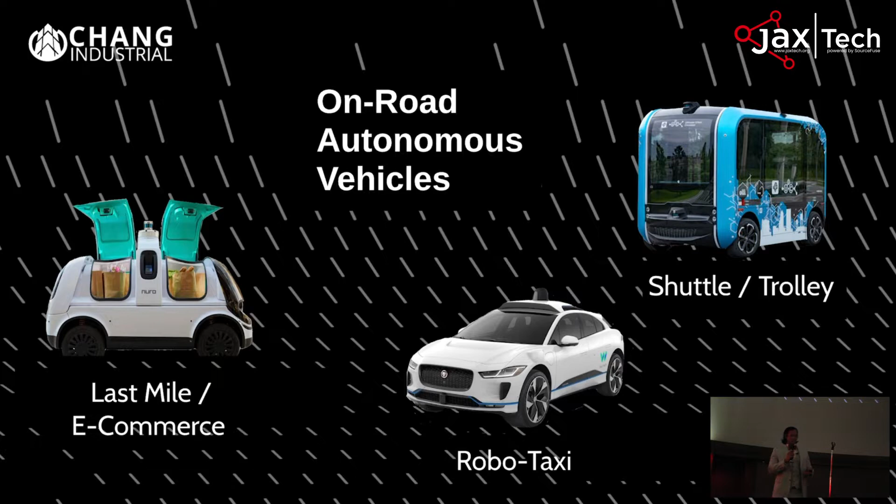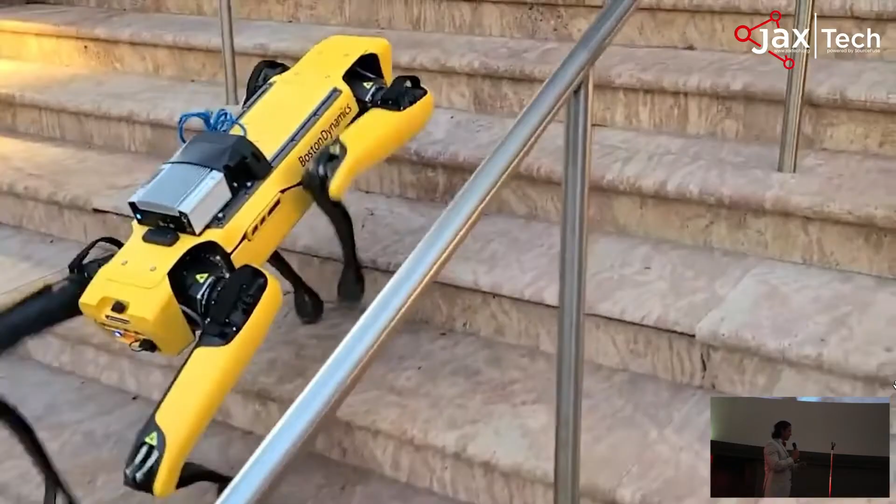Next, we're going to jump over to off-road. This is where things move a little bit faster. So we'll start with Spot the Robot Dog, because we can't talk about autonomous navigation without Spot. But I want to give context of what companies are able to do. One of the interesting things about Spot right now is that it's being driven by open form fleet managers. So now all of a sudden, that proprietary technology by Boston Dynamics is being driven by anyone, as long as you have the know-how to drive that driverless package.

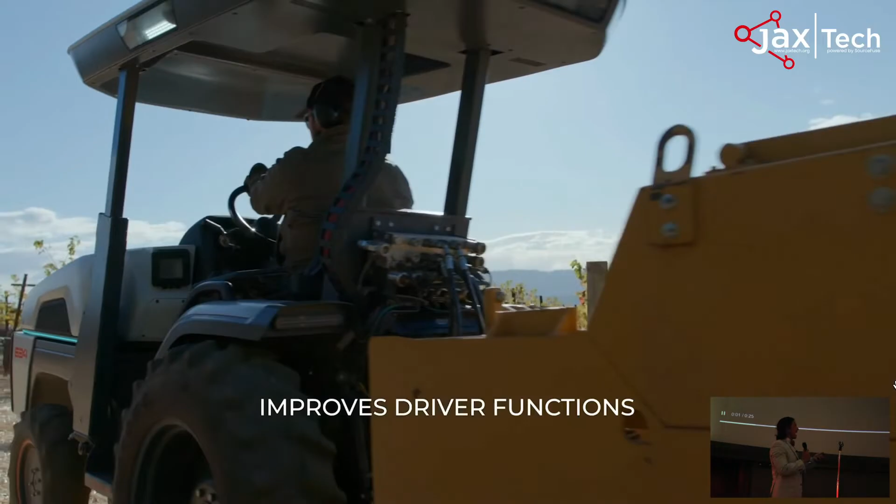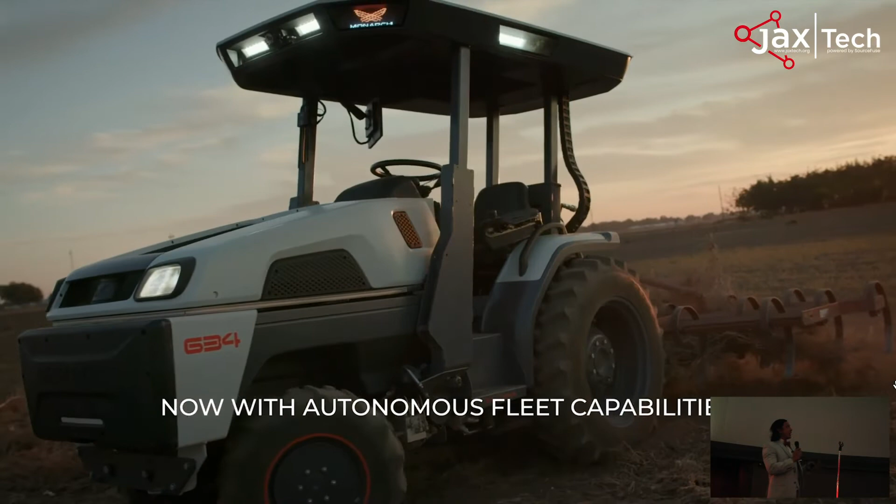The next one we're going to look at is ag. So what is happening in ag? That's a super exciting space, and there have been a ton of announcements just this year about driverless and autonomous electric-driven agricultural vehicles. Why is that interesting?

Because we actually have very little science about most of agriculture. We'd love to know about crop densities. We'd love to know about yield, what we can expect at the end of harvest. We'd like to know how our fertilizers or our pesticides or sunlight or drought conditions are affecting crops, and we just don't know that right now. So by adding this layer of technology, the industry is headed that way.

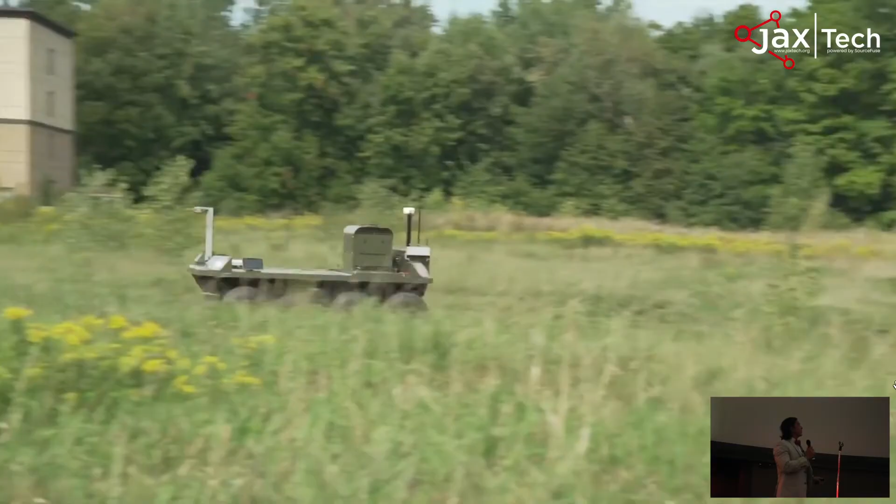Finally, are there any drone owners in the audience? Anybody own a drone? Okay, that's good. I feel like that was planted. We had some hands go up. So if you like the idea of drones, it's pretty easy to see that you might have your own little driverless vehicle soon. I mean, that just looks super fun.

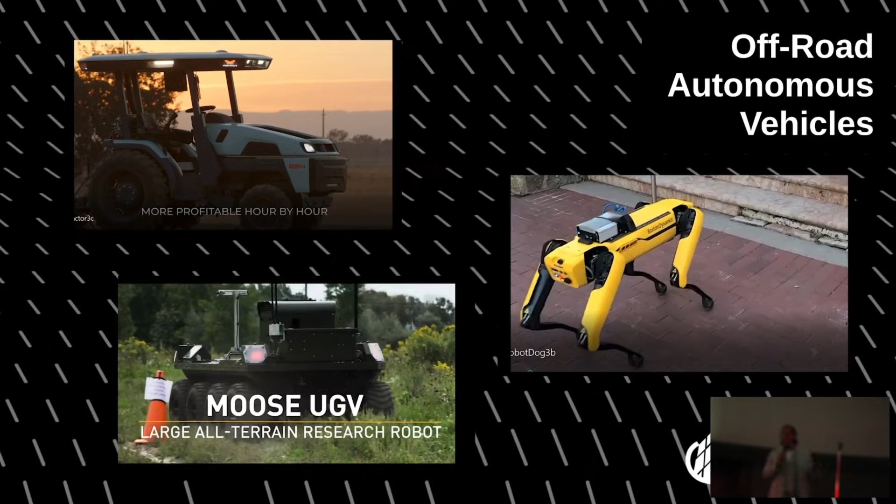And so what's happening is the operational design domain, the ODD, of these off-road vehicles is different than what's happening on-road. We're not constrained by regulation, so we can do some really cool stuff. That also applies to things like the military and mining. So I'll do a quick pause. We talked about what's happening on the road. Who's driving it? We talked about off-road, and you got a sense for just how diverse those driverless packages are.

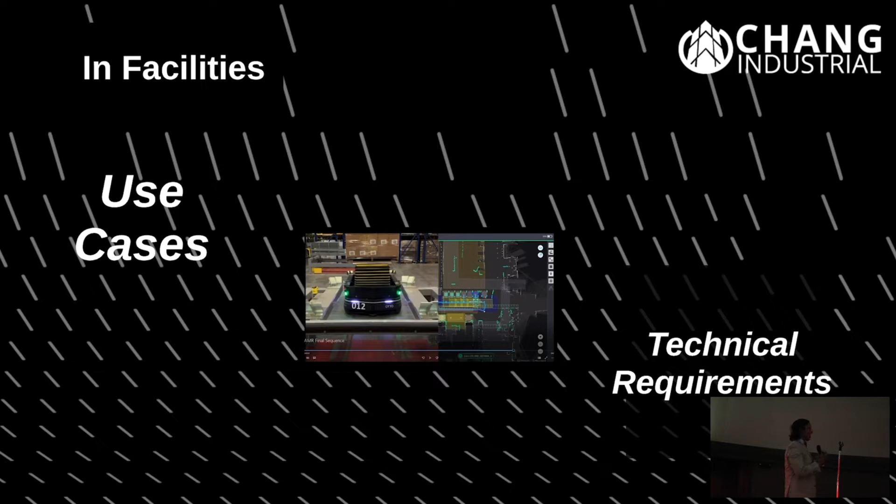And now we're going to look at what's actually making economic sense. I don't think either of those have a payback to them, but we're going to jump in right quick and look at what's happening in factories. So I'm going to start with the concept of islands of automation to networks of automation. Your traditional advanced manufacturing or e-commerce facility is an island of automation. It's a bunch of robotic or mechanized automated machines separated by people moving stuff around and trying to do stuff.

In the new paradigm, driverless vehicles inside of facilities connect everything. So now we have a network of automation that smartly moves and manufactures for itself. So the first thing, I'm going to talk to you about a use case that we did with a greenfield facility.

This was roughly 100 autonomous vehicles in an advanced manufacturing site, 2 states away from here, so pretty close. And the average driven miles per day is about 1,100 miles per day. So do the math, that's about 400,000 miles per year being driven autonomously inside of a factory.

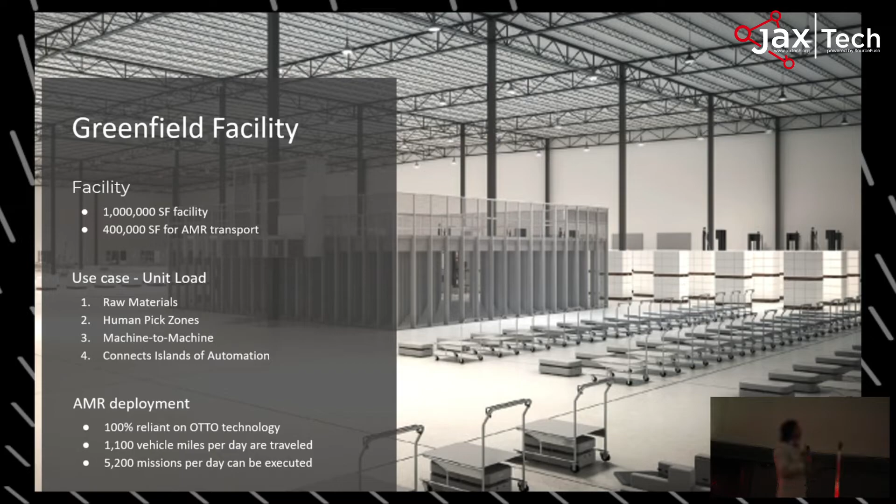The next one we'll look at is a brownfield retrofit. This was a factory we did that was existing, and it had to be retrofit with existing workers, existing equipment, existing storage systems with autonomous vehicles. In this case, the form factor was a pallet.

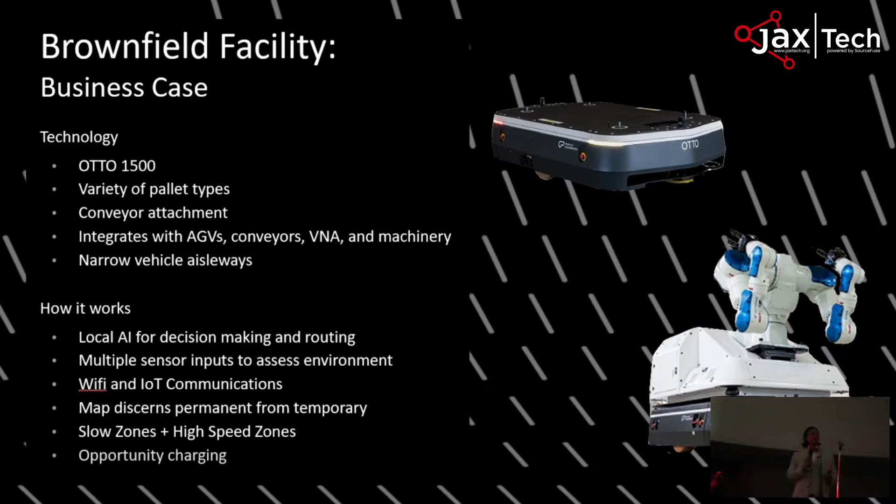We wanted to move pallets around, pallets of goods, empty pallets, full pallets, work in progress pallets. And this one accomplished about 900 missions per day. So in other words, 900 forklift driver put aways or pickups were converted to autonomous.

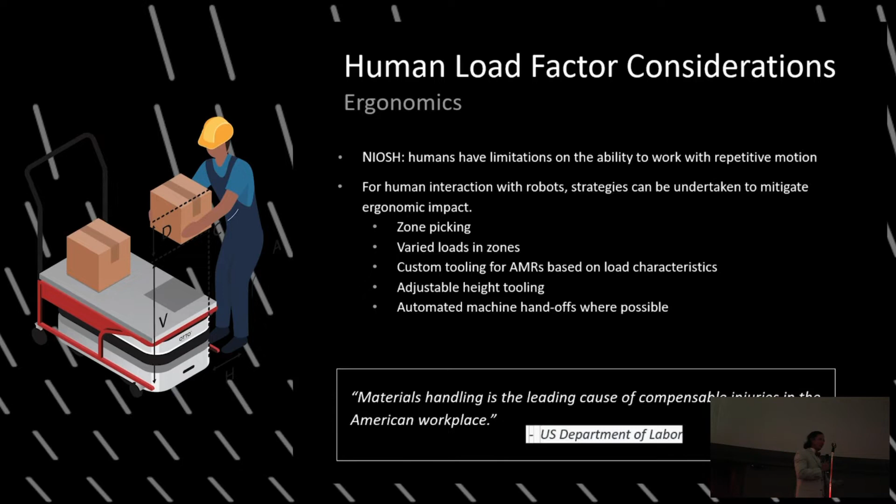And what is basically driving this design? It's the interaction with humans. The single biggest design factor that we have inside of a facility is the ergonomic considerations of humans and the safety considerations of humans. So we consider that closely and intensely before we start the system design, because if the robot and the human don't work well together, the system's not going to perform.

And then finally, what are the dollars and cents? Why are companies doing this? The reason they're doing this is because compared to manual labor, driverless vehicles in a factory are about 10 times more efficient or cost effective. Compared to conveyance, which might be the mechanized alternative, they're about twice as effective. And we have similar stats with forklifts and driverless forklifts.

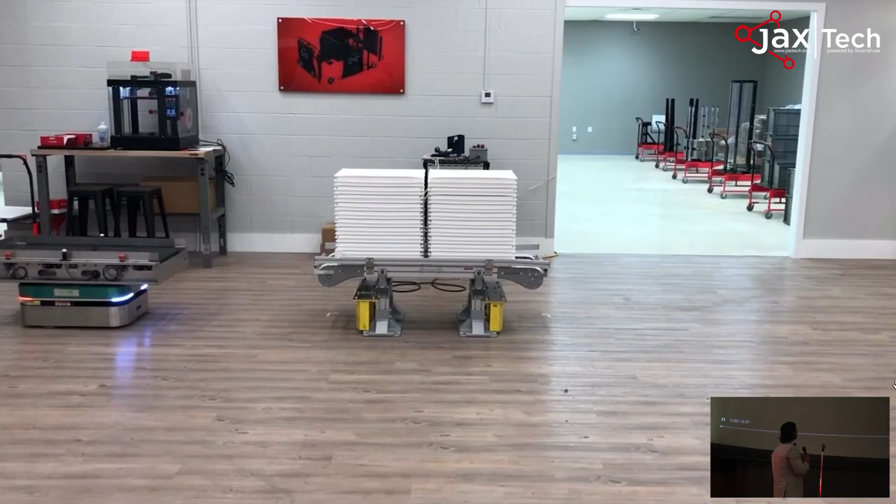All right, so let me show you a little bit. This is basically 3 years worth of engineering. We summarized it down into a little 2-minute clip, and I'll just add a little color commentary as we go along. This is the idea of robot-to-robot integration. So we have a driverless vehicle that is connecting in the test lab to another automated cell. The two are talking via IoT to accomplish their mission.

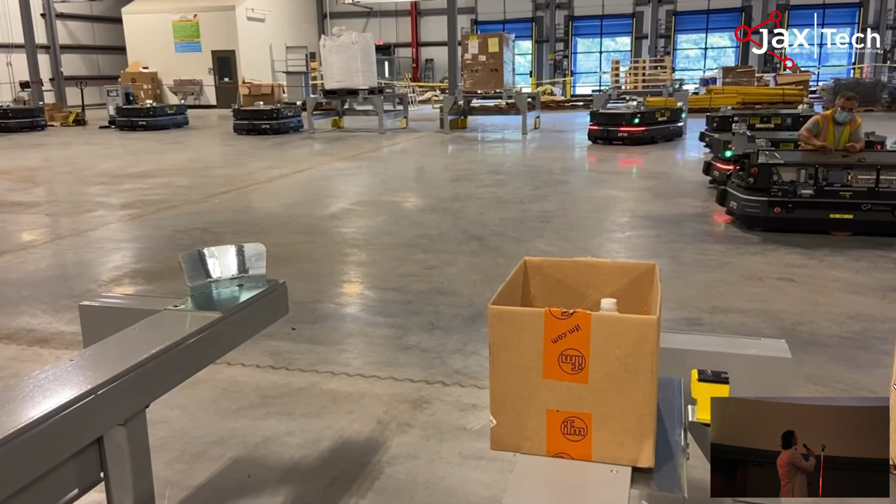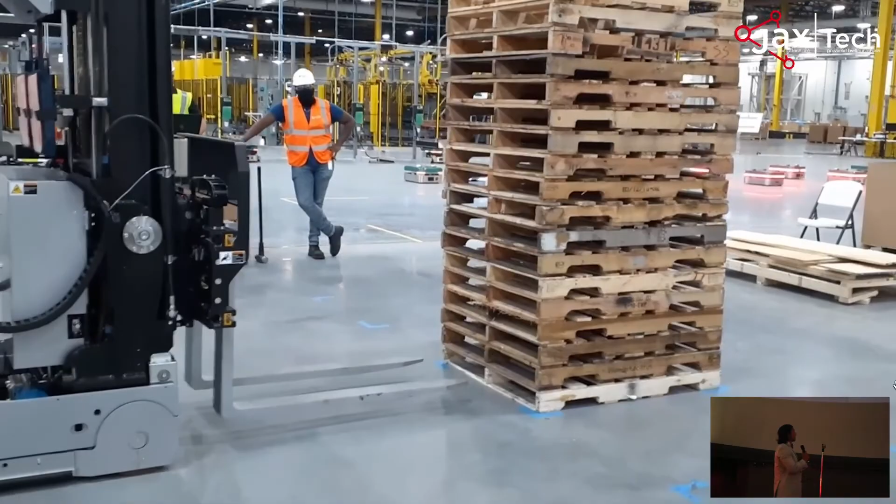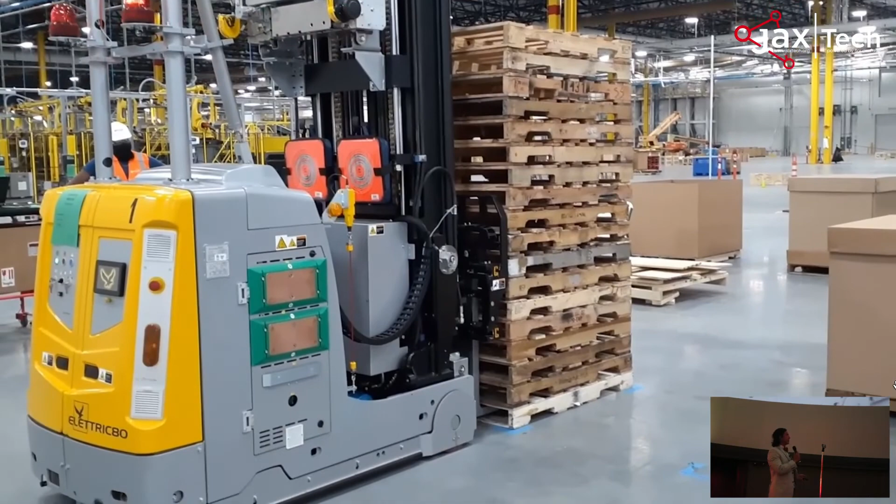Here we can get a look at the fleet manager. On the left you can see all the mission orders. The system is saying, here's my mission orders, I want my fleet to go do these things. This would be another form factor of vehicle that can be integrated to this platform. This one is obviously specialized for a forklift.

And then here's some testing of vehicles where you can see large wooden crates were set out in the setup and testing phase to say, hey, these are in the way. Can the vehicle autonomously navigate around the obstacles and maintain its efficiency?

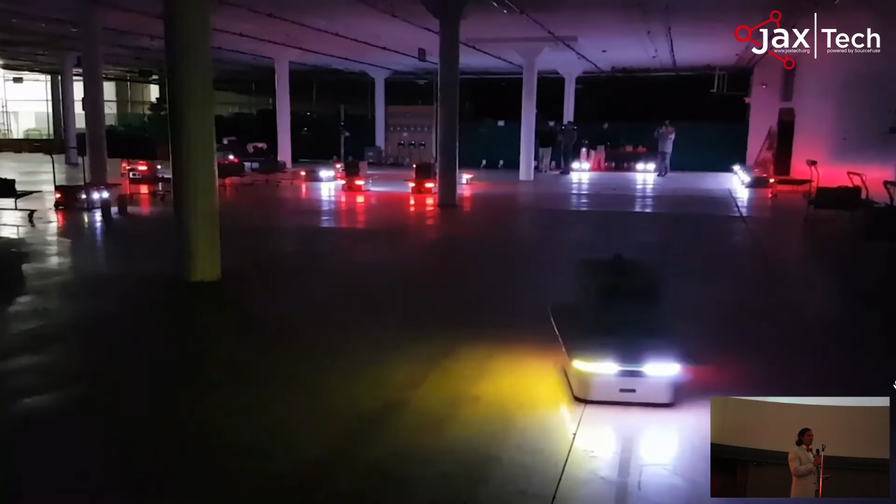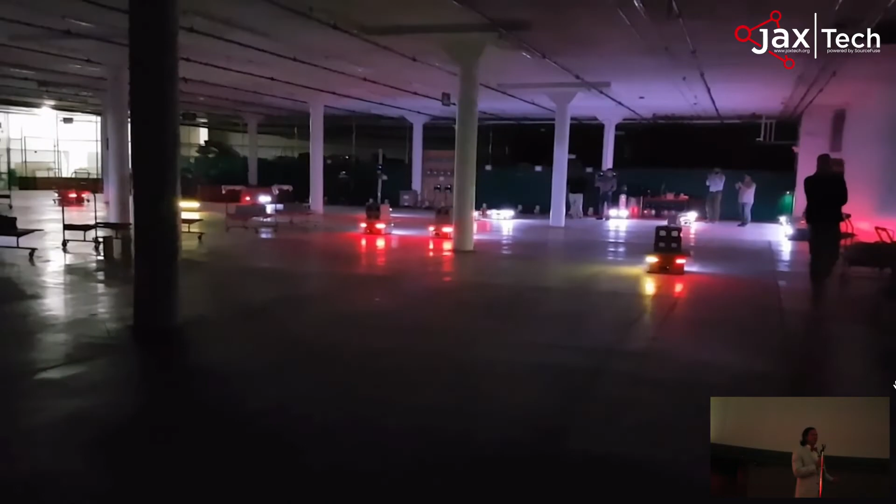Here's another lights out test. My head engineer was pretty cruel. In the middle of a factory acceptance test, he went to the power panel and pulled the disconnect. We didn't know what was going to happen, but everything there is lithium ion powered and it can see in the dark. So the system kept performing, the test was not even disrupted. You can see all the engineers got excited and filmed.

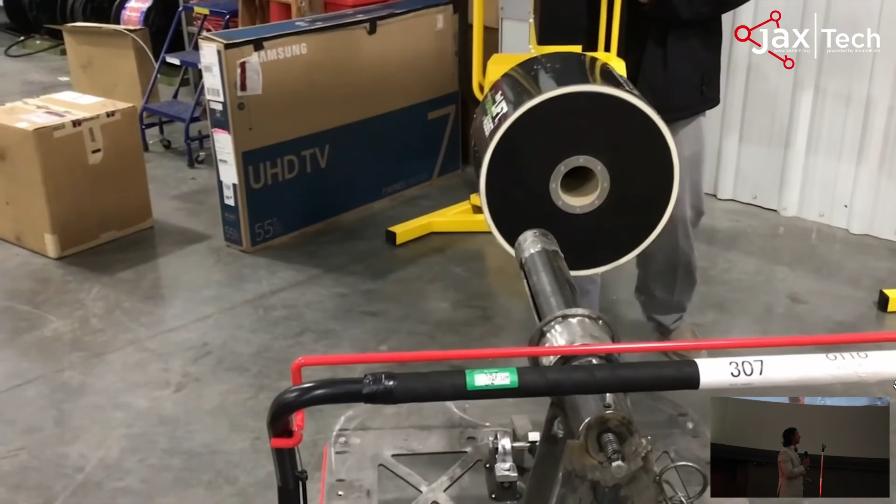Here's some of the ergonomic application. The design load for this particular unit here is about 75 pounds. It's a metal reel. And so there's an ergonomic assist added to the human. The goal here is employee retention. We want employees to have jobs that aren't backbreaking.

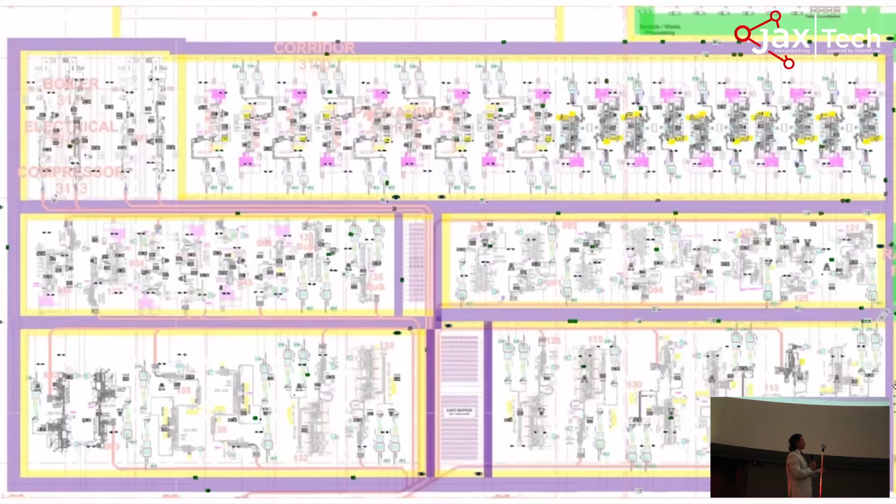That's what keeps employees. Here's a quick look at the simulations that we do. We take 365 days of operation, we compress it into one super fast run on a supercomputer overnight. We come back the next day and we see what broke. And that's one of the tools that we use to tweak the systems. And then here you're going to see live map updating.

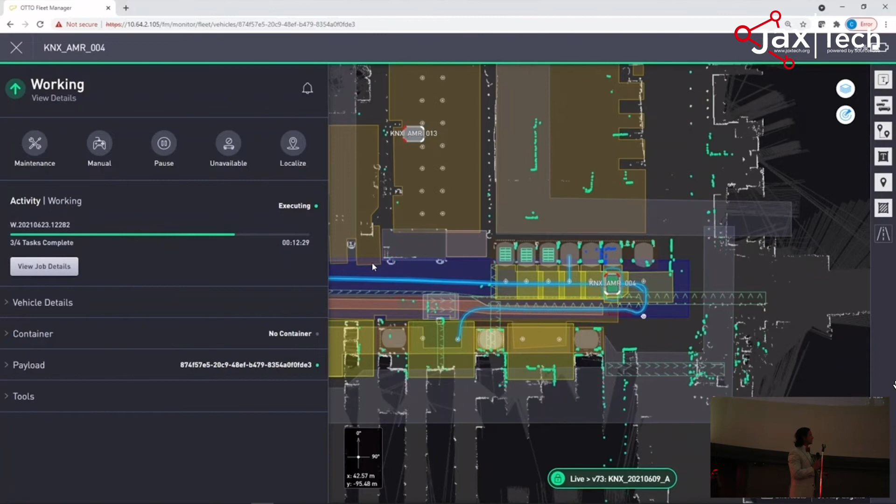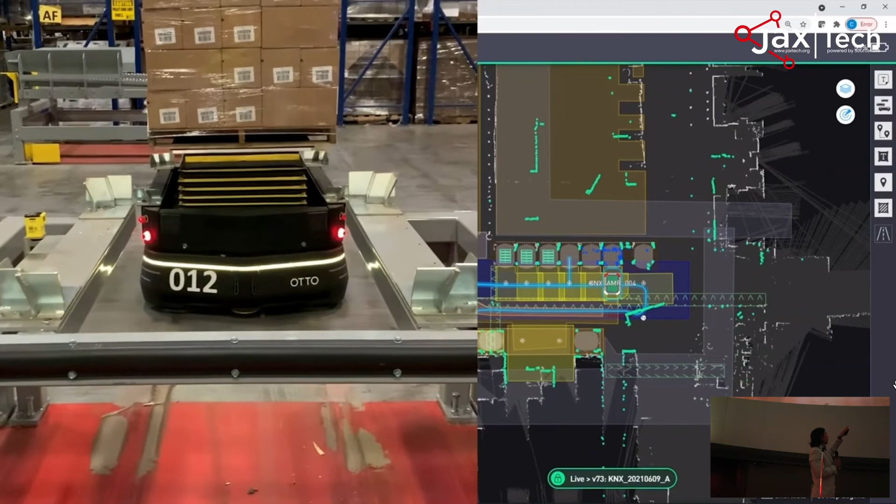And the reason I've got the dots highlighted is it shows you in real time the maps being updated. And then you can track the vehicle being shown on the fleet manager to what's happening here. Those are both real-time synced, acknowledging the mission and having real-time data coming off the vehicles.

There's a powered tool on top that helps. In this case, we're doing pallet lifting. So we've attached a powered tool that runs off the lithium ion of the vehicle.

Okay, and then we're going to bring it home with some tech. Kelly said make sure there's some tech people here, make sure you talk about the tech. So essentially, I'm going to go really fast, but if you take notes or if you remember, this is the cheat sheet of our last 3 years of learning of how to design automated manufacturing systems using autonomous technology.

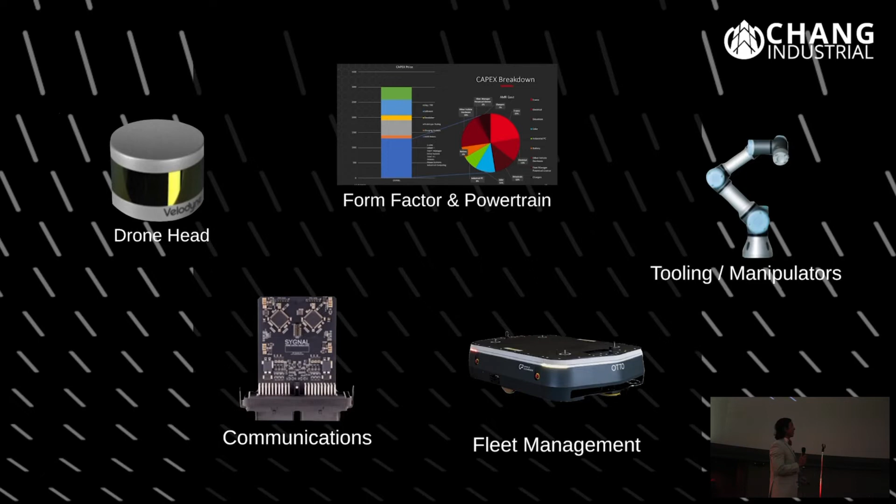So the first thing we're going to talk about is the drone head. That is pretty much the most important piece. Good news for everybody here, it's also commodity now because there's so many other industry pioneers. It is the AI driverless package. It's comprised of vision, sensor fusion, the actual AI software which runs as a firmware local to the vehicle, and

then the industrial computing. Those vehicles you saw earlier have enough industrial computing to run a Bitcoin node on them. So it's a serious amount of horsepower to compute all this vision that's happening and perform in a real-time and safe manner.

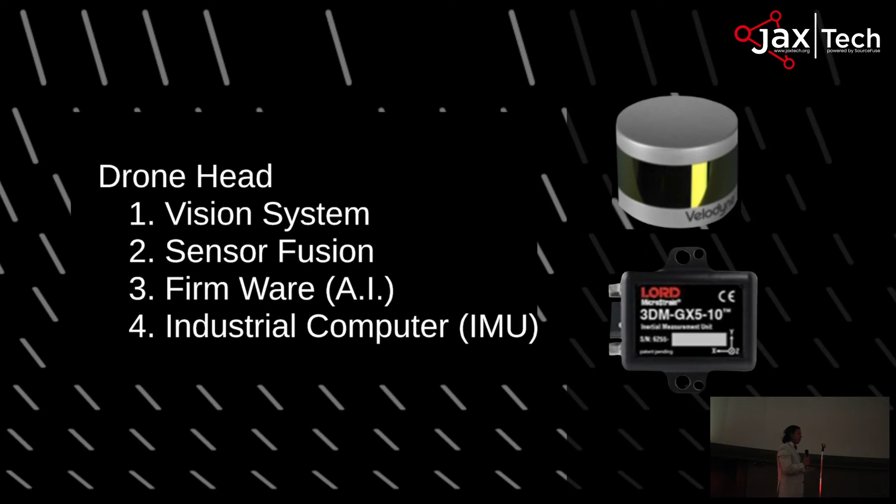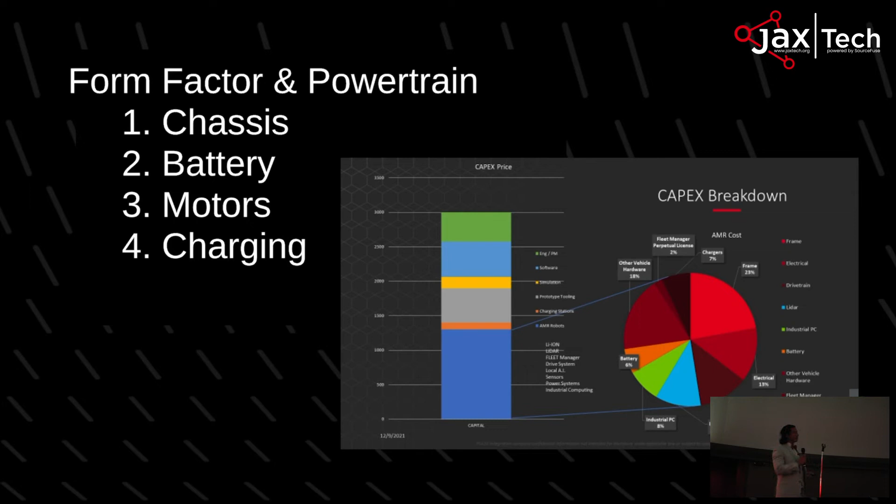Next is the tooling. What we want to have is consistent form factors. We want the same vehicle, basically a bunch of them in a fleet, and then we want a bunch of interchangeable tooling so the vehicles can do different things, different functions at a very low cost. The tooling is cheap, the vehicles are expensive.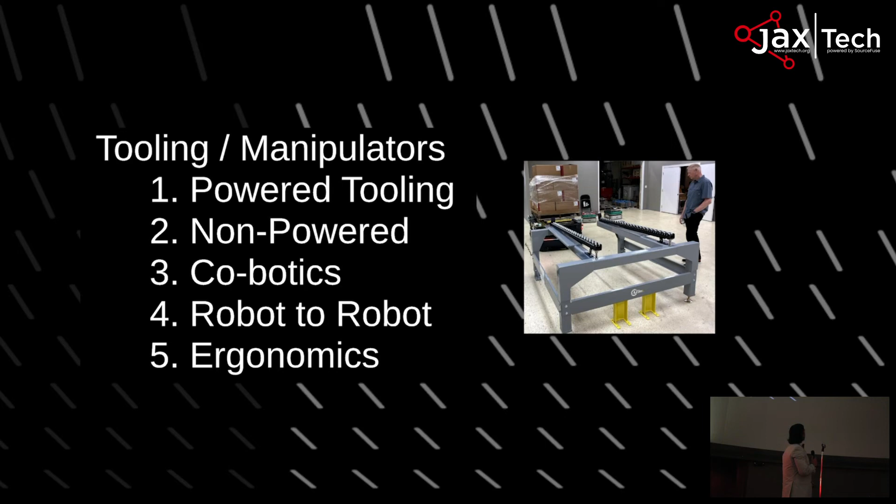Fleet management is arguably the most secret sauce. A couple years ago, when I was helping JTA procure some of this, it was complete vaporware in the industry. Today, there's several established platforms, but the fleet management is the most important part, and it's what drives the interoperability of both present-day vehicles, the vehicles that you're going to have coming online in a generation 2 or 3 soon, and then other OEM vehicles that you want to work together.

Also, this idea of supply chain is so big right now. This is where you get the intelligence through the supply chain. We want to have track and trace, traceability within our facilities so we know how goods got made, what got delivered, when it got delivered. We also want information going to the enterprise so we can offer insights back to the business and the global supply chain.

And then the final piece that is really important to think about is communications. You would think it's just all Wi-Fi. And the early generation of these vehicles about 2 years ago was all Wi-Fi. Today, we require a spectrum approach because we have different types of data streams. We want those different types of data streams communicated over the appropriate communications protocol.

So we've got our IIoT. We usually call it IIoT handshake when we design it in. We want 2 things talking together, confirming locally without going back to central command. Wi-Fi, if you have Wi-Fi at your house and you Zoom call a lot, you know how often it goes out. If we're totally reliant on Wi-Fi, that's how often our robots go down.

And then 5G. We think every facility in the future should have its own private 5G network. And then finally, more advanced communication for specialty data communication like long-range LoRa. We want to be low power consuming, and then we want to transmit with different latencies based on the data stream. So that pretty much wraps it up.

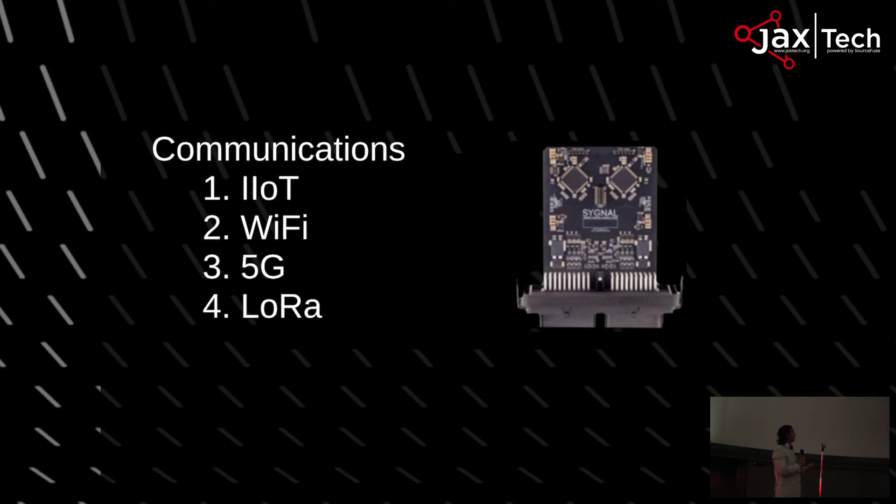And I'll come back here. The thing that my team is used to hearing me say: limit the use case. Limit the use case, limit the use case. With driverless, people want to do everything. We get it. But you're not going to be successful if you do that, or you'll be over time and over budget. So to bring it home for a successful project, limit your use case. So hopefully that gives you an idea what's out there, what's happening right now, and what the industry looks like.